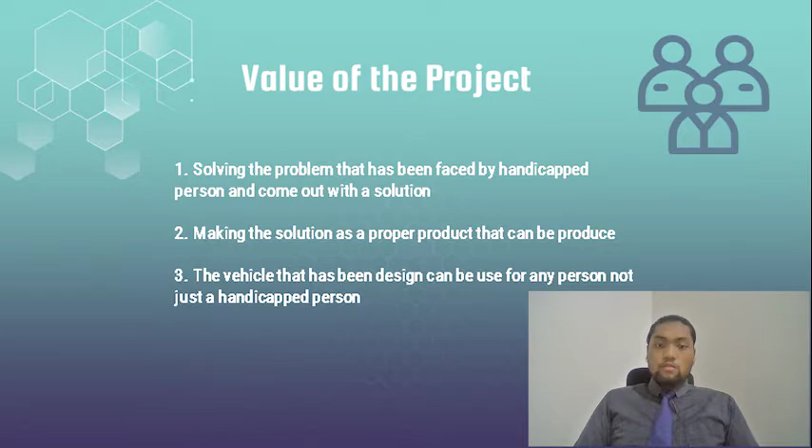The value of this project is solving the problems faced by handicapped persons and coming up with a solution. We identified many problems that have been faced, and we tried to make the solution into a proper product that can be produced. The vehicle can also be used by any person, not just a handicapped person.

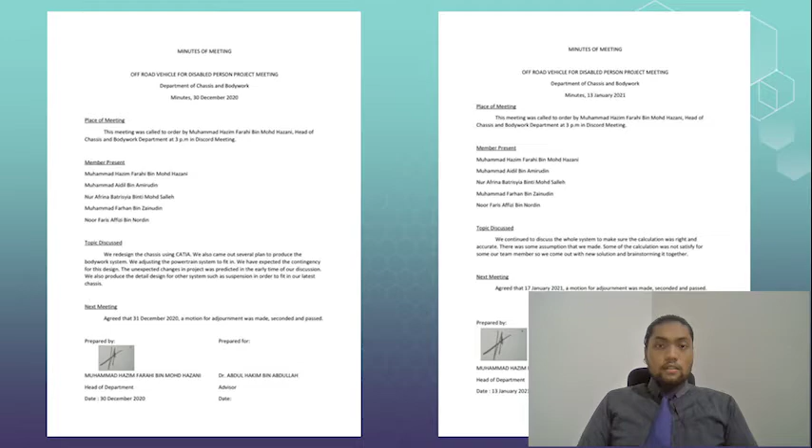This is the Gantt chart that we developed and planned, along with the actual timeline that we used. These are 2 examples of minutes of meetings that I have inserted in this presentation, but if you want to see the full minutes of meetings, you can click the link that has been shown.

For the contingency plan of unexpected changes, we came up with several drafts. While identifying the problems, we decided to come up with several drafts as a safety measure to properly follow the Gantt chart. We also discussed the several outcomes and possibilities from each design, making sure the project timeline was sound so we could make small adjustments through the Gantt chart. We also made sure the plan was adjustable in many ways.

As such, when we develop a draft or chassis for the vehicle, we expect that we can make changes in certain parts so that we don't have to make major adjustments to the chassis and bodywork.

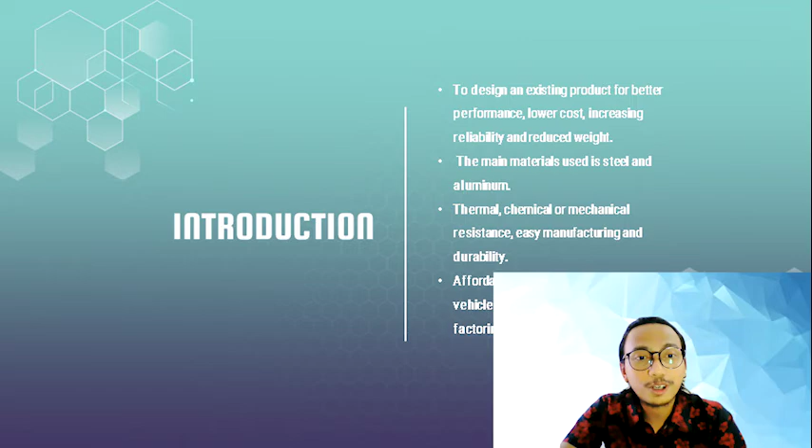At the end of the project, during the project, we came up with an idea, which is to use steel or aluminum as the main materials. The reason we chose steel and aluminum is because they are easy to find and buy at the marketplace. We also chose these materials because of their performance properties, both chemical and mechanical resistance. The material has very high performance and lower cost, so that's why we chose steel and aluminum.

For the indirect costing, we have two parts: indirect manufacturing and indirect administrative. For the indirect manufacturing, we have repair and maintenance, which is 700 ringgit, office electricity bill 300 ringgit, indirect labor wage 500 ringgit, and rent and taxes 1,800 ringgit.

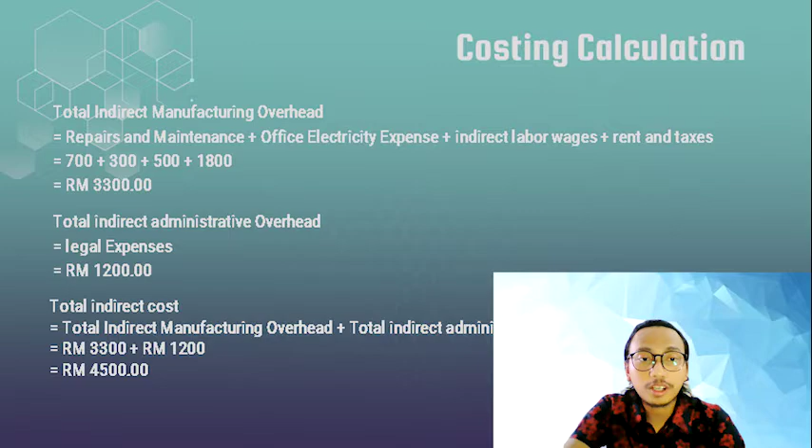So for the next slide, I will talk about the bill of materials. You have to know that the bill of materials is usually included in the direct cost, as well as the labor wage.

So after we planned and calculated, we got 4,572 ringgit and 10 cents for the bill of material for the direct cost. Then totaling up with the labor wage, we have 6,572 ringgit and 10 cents for the direct cost.

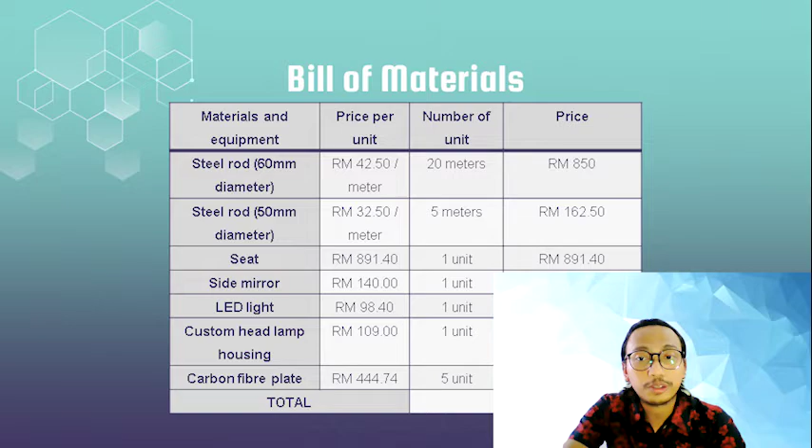So that is for the costing presentation, for the costing of the production of the chassis bodywork. Okay, that's all for me.

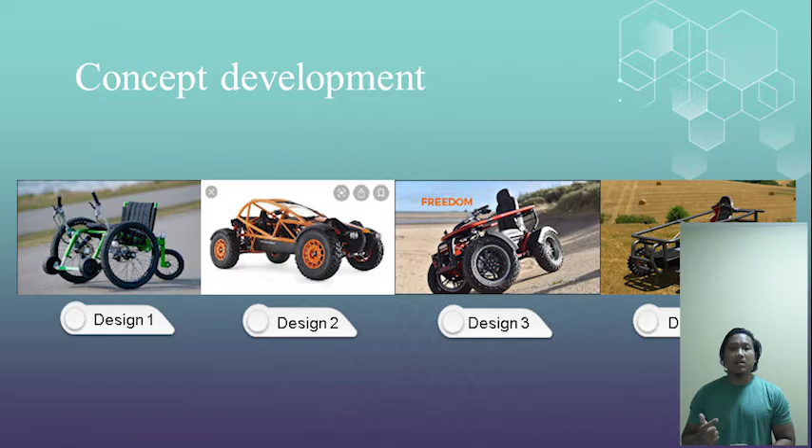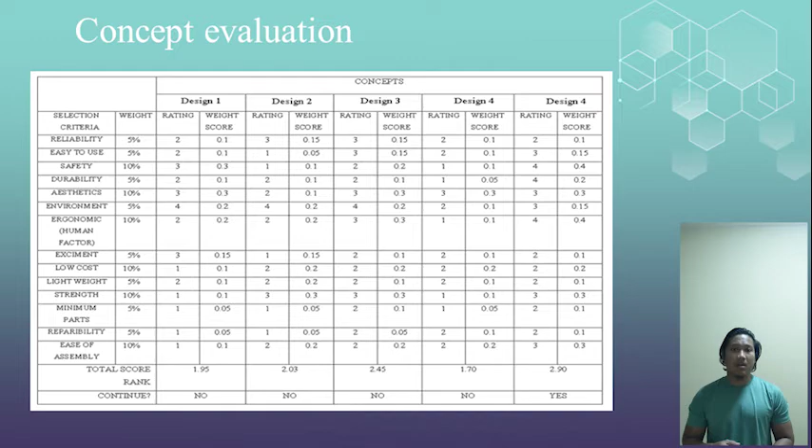In concept development, our company proposed four types of vehicles that differ in shape, size, chassis, and material. For evaluation, we considered several criteria such as safety, durability, and ergonomics. Every part of the vehicle is measured and given a score and rating for each criteria. After scoring, we sum up all the scores to get the total score for each vehicle. The vehicle with the highest score is selected for the next step, which is concept selection.

In the concept selection, the vehicle is studied again. The good and bad parts of the vehicle are listed. The bad parts of the vehicle will be replaced to improve its quality. That's all from me. Thank you.

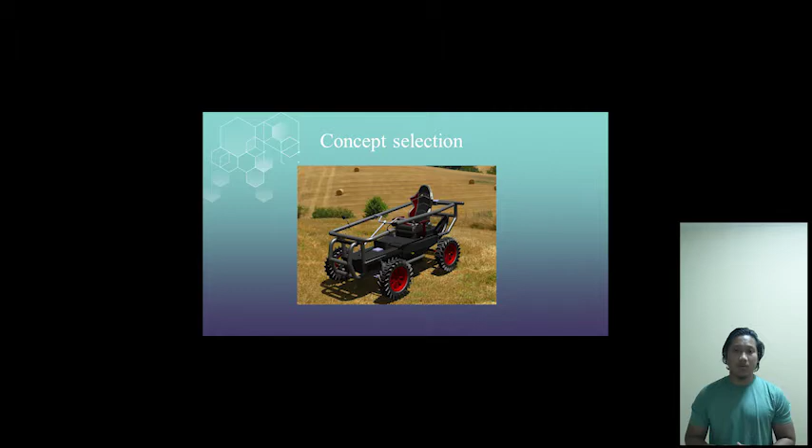In this session, establishment of production and engineering blueprint, I would like to present the blueprint of our chassis and body parts. There are 13 drawings in total, consisting of assembly drawings, exploded drawings, and parts drawings. All drawings follow a standardized template, including the company's name, designer's name, reviewer's name, title, part number, date, scale, and paper size.

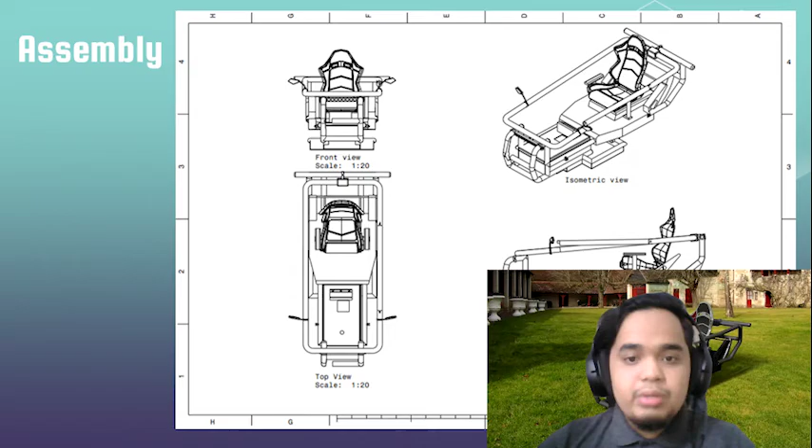Let's go to the first drawing, the assembly drawing. In this drawing, all the parts, including the chassis, are assembled together with proper positioning. The assembly drawing consists of four views: isometric, front, top, and side view. This drawing is drawn on A3 paper with a 1 to 20 scale.

The next drawing is the exploded drawing. In this drawing, all components or parts are disassembled to produce an exploded view. All parts are labeled with numbers so that the bill of materials can be generated, allowing parts to be easily located. This drawing is drawn on A0 paper with a scale of 1 to 5.

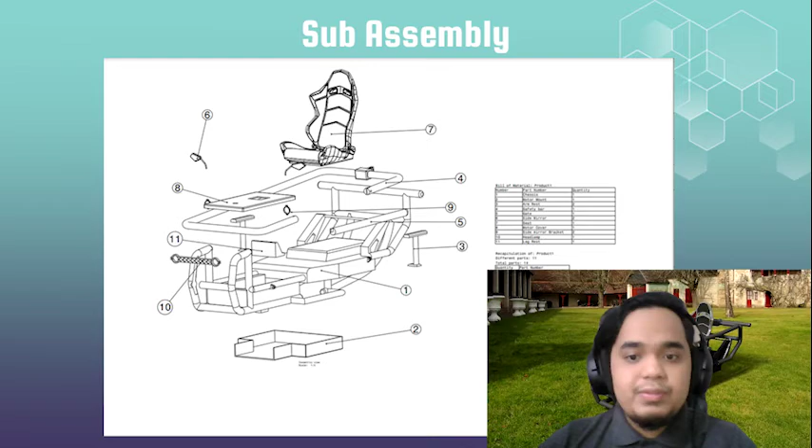The last set is the parts drawing, totaling 11 drawings. Each is labeled with proper dimensions across 4 views: front, top, side, and isometric view. The drawing is on A3 paper with the part number labeled. By referring to all these drawings, all parts and components can be readily fabricated.

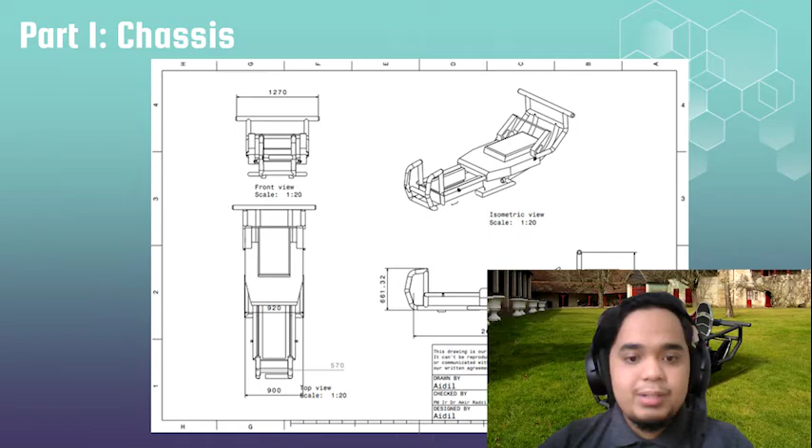Thank you. As for the establishment of final design, we have identified the maximum length, which is 2680 mm, the maximum width, which is 1270 mm, and the maximum height, 910 mm.

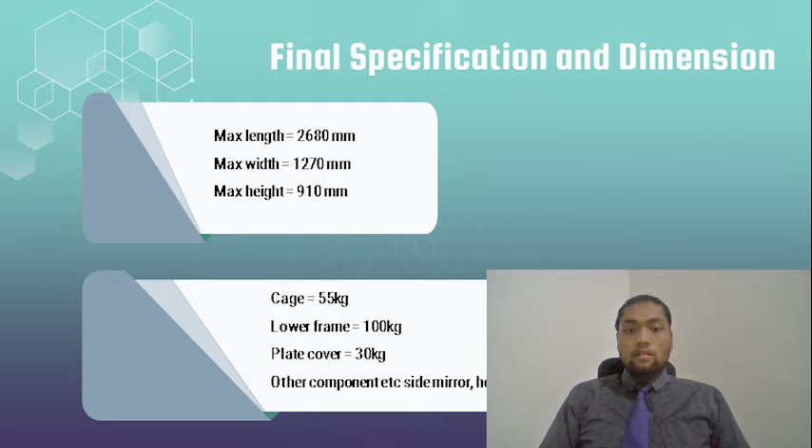The cage weighs approximately 55 kg. The lower frame weighs about 100 kg, the plate cover weighs about 30 kg, and other bodywork components weigh approximately 15 kg.

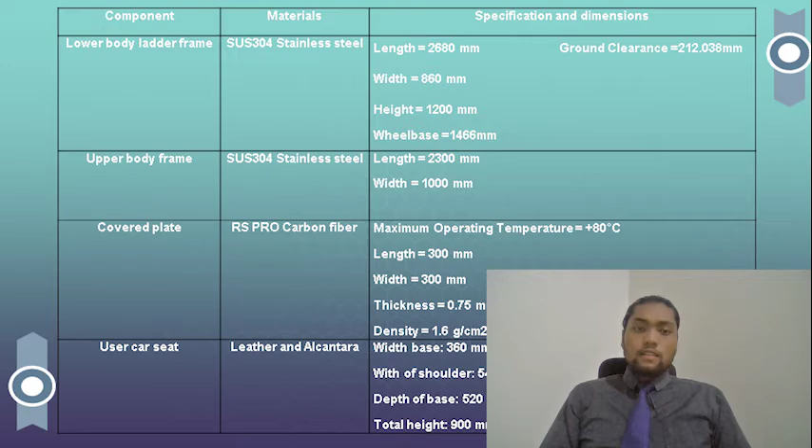The materials used for each component have been listed in the presentation. For the lower body frame, we use stainless steel, same as the upper body frame, but with different specification and dimension for each. For the cover plate, we used RS Pro carbon fiber, which is very light but high in strength and toughness. For the user car seat, we used leather and alcantara material to provide comfort and durability for the user and the vehicle.

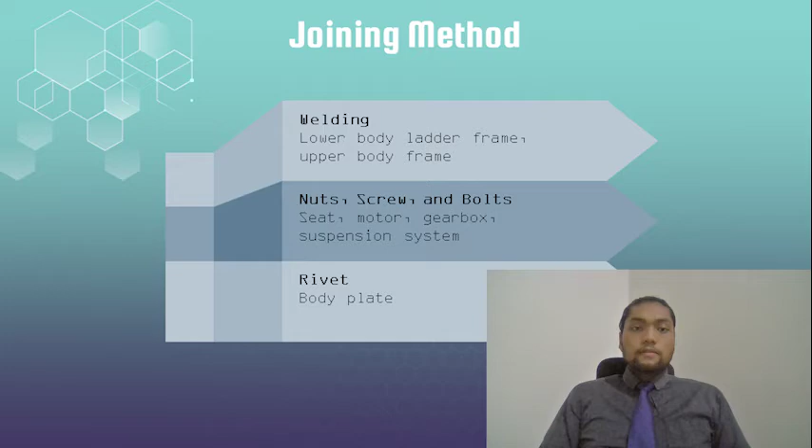For the joining method used in making the chassis and bodywork, we use welding for the lower body frame and the upper body frame. Welding is commonly used to create a permanent joint between two materials, specifically metal. Nuts, screws, and bolts are used for the seat, motor, gearbox, and suspension system. This joint is not permanent because some components can be replaced easily. For the body plate, which is carbon fiber, we riveted it to the chassis so the joint will be strong enough to withhold.

As for user control and adjustment, we agreed from the beginning of developing the product that we would design a chassis and bodywork that is easy for the user, as the user is handicapped. The user just needs to lift up the sidebar of the vehicle to get in, then adjust the position of the seat to reach the handlebar.

Then when the user is comfortable, the user needs to adjust the fit of the seat belt at the seat, as we use a 5-point harness seatbelt. It is ensuring the safety of the user.

The product performance is the safety assurance that we have provided from the chassis and bodywork department. The cage is strong enough to withhold many forces.

The stability of the chassis and bodywork - we have determined the most suitable length, weight, width, and height of the vehicle to maximize stability for the user and the vehicle. We also use a top-notch material.

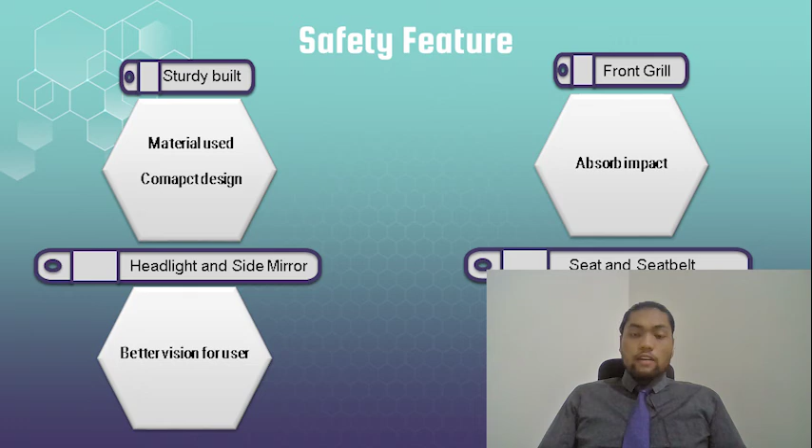We also use headlight and side mirror for better vision for the user. The off-road might be a little dark and have many blind spots, so we have to overcome this weakness by adding headlight and side mirror.

Assalamualaikum warahmatullahi wabarakatuh. My name is Nur Afrina Patricia binti Muasaleh. Today I would like to present about engineering analysis results.

Before deciding which design solution to implement, we performed several types of analysis on each design. Every design problem is unique and requires different types of analysis. The analyses we considered are functional analysis, ergonomics, economic and market analysis, product safety and liability, and last but not least, strength analysis.

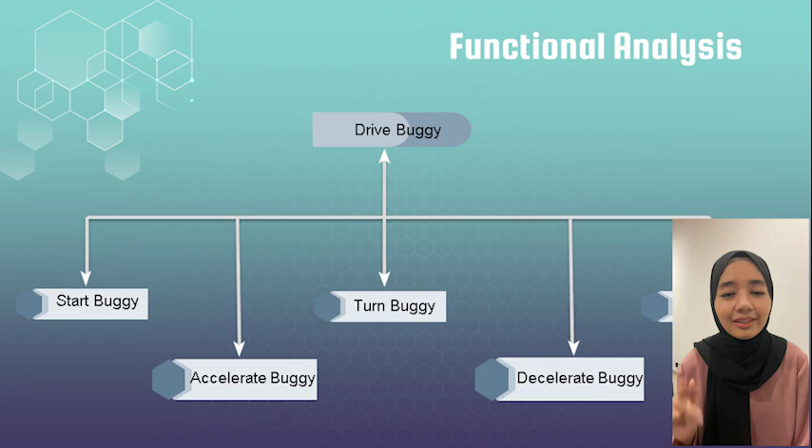First, functional analysis. This determines whether the given design solution will function the way it should. Functional analysis is fundamental to the evaluation and success of our design. A design solution that does not function properly is a failure, even if it meets all other criteria. Our product is a buggy car, and the functional flow to drive it is start, accelerate, turn, decelerate, and stop.

Second, ergonomics. Ergonomics is the human factor in engineering - the study of how people interact with machines. Most products have to work with people in some manner. A successful design has been evaluated and analyzed against the distribution of geometry of the people using it. Since people come in different sizes and shapes, we assure that our design fits the user.

Third, economic and market analysis. The net result or purpose of most engineering design is to produce a product that generates a profit for the company. Our design has been evaluated against criteria such as sales, features, potential market, cost of manufacturing, advertising, and so on.

Next, product safety and liability. The primary consideration for safety in our design is to ensure that use of the buggy does not cause injury to the user. For example, our design has a side mirror and brake system.

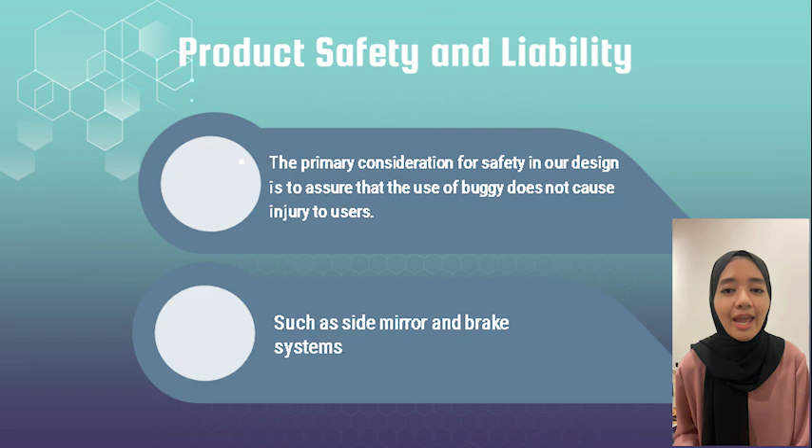Last but not least, strength analysis. We have done calculations of shear force and bending moment to determine whether our design alternative will be able to support the specific mechanical loads. As a mechanical system is subjected to applied load, it will deform or deflect. That's all from me. Thank you.